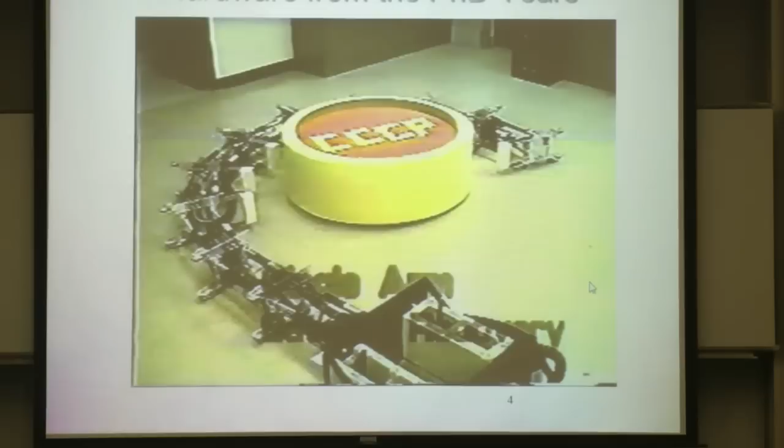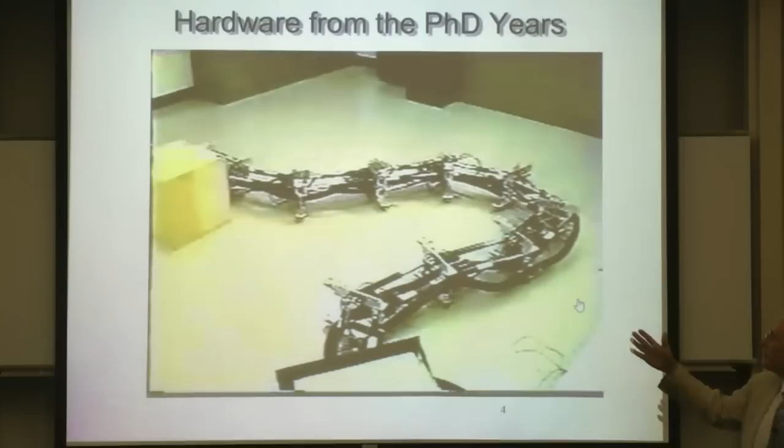So as Howie mentioned, I started my academic career building robots like this. And to show you how old I am, this was supposed to be a robot in outer space catching a Soviet satellite way back then. This was the land version of that. And the idea of this 30 degree of freedom robot was that it would have enough freedom that it could circumnavigate obstacles, do things like inspect power plants or do inspection tasks on assembly lines, things like that.

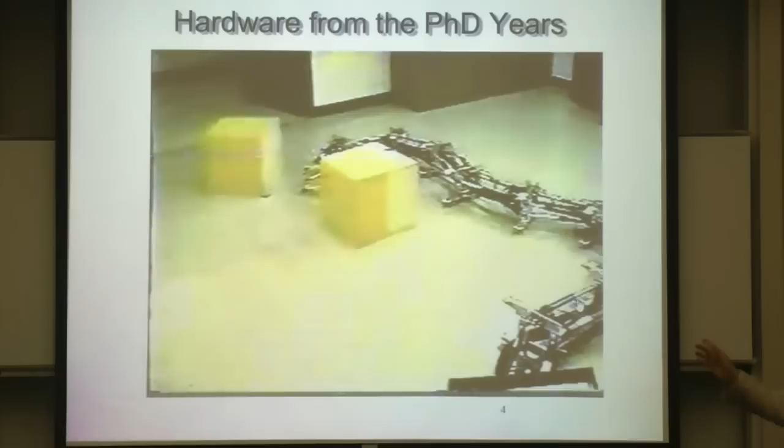And in fact, I showed these very same videos when I gave a lecture here, I think in 1991 was the first time. And so this is all older work. And these are simulations from those old days where we can use snake-like robots to perform caterpillar-like grasping and manipulation of objects, or to do inspection in moving obstacle environments like on an assembly line.

So this is what I did in snake robots way back when. And then shortly after starting at Johns Hopkins many years ago, decades ago actually, we came to this concept of what we called the binary manipulator. The idea being that to make very inexpensive, lightweight robots, instead of using heavy, high torque motors, we could use pneumatic cylinders, which are very lightweight and have a very high payload to weight ratio.

And the idea is with a pneumatic cylinder, instead of trying to control it in the middle of its stroke, drive it all the way to one end or all the way to the other end. So that's a binary actuator. And so if you make a platform manipulator out of these binary actuators, you get a 3-bit manipulator. One binary actuator per leg, so a total of 2 to the third or 8 states, because you have 3 bits here. And we can take these binary actuated platforms and stack them on top of each other, and then you get something that looks like this in the planar case.

And so the surgeons were viewing that as a nuisance, but Alison Okamura had the intuition to say, well, could we use that to our benefit? And she came to me, I don't know, 2002 and 2003, and asked, can we develop a model to describe the motion of this? And so I developed a kinematic model. It's a non-holonomic model that looks like this. So it's kind of like a kinematic cart or a steerable wheel, but moves in 3-dimensional space.

And so with this needle, if you push the needle in, you can make the needle curve on a circular arc. And if you twist at the base, you can reorient the tip. So by pushing and twisting, you can actually steer this system in 3D. But what we noticed when we performed experiments, and the experiments were not performed by sticking needles into people like a pincushion, but rather using a block of porcine gelatin. Because it's transparent, with the camera setup in the shared lab facility, it was possible to trace where the needle was going. And so the needle wouldn't go the same way every time.

There'd be slight deviations. And so we augmented the model with stochastic terms, and so we end up with a stochastic differential equation that describes random walks in pose as a function of time. And so these are Brownian white noises, so increments of Wiener processes, unit strength. This is a coupling matrix, and we were able to show with a very simple 2-parameter model on the noise that we could reproduce the range of different trajectories that this needle was taking.

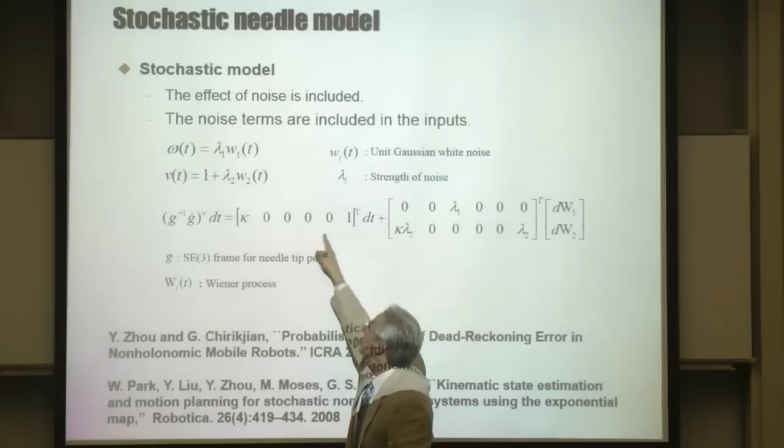If we didn't have any noise here, this just says that the needle wants to follow a circular path with curvature kappa. And the G inverse G dot is a body velocity, and the V is like in the Murray, Li and Sastry textbook, for those who've taken an intro to robotics course, that takes this velocity and writes it as a 6-dimensional vector.

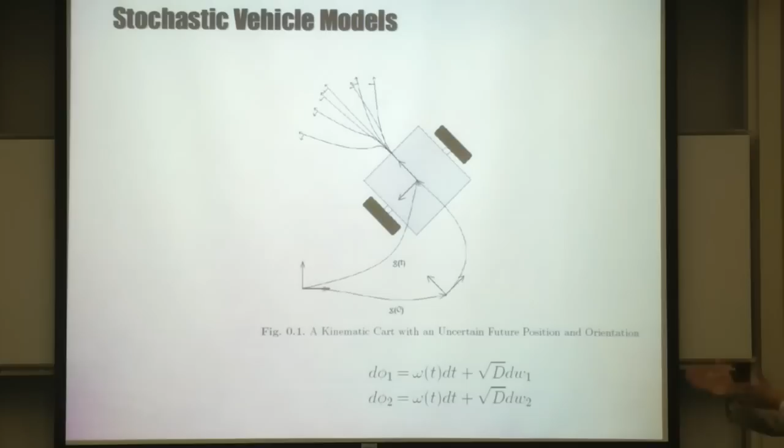So now that's the spatial version, the 3D version of a non-holonomic vehicle like a kinematic cart. So if you have a kinematic cart, just like a wheelchair where each of the 2 wheels can move independently, and if you tell those wheels go straight forward and do dead reckoning, you believe you're following a straight line forward. But actually, if the wheels slip or there's a little bit of jitter in the motors, then you'll veer a little bit to the left or a little bit to the right or zigzag back and forth.

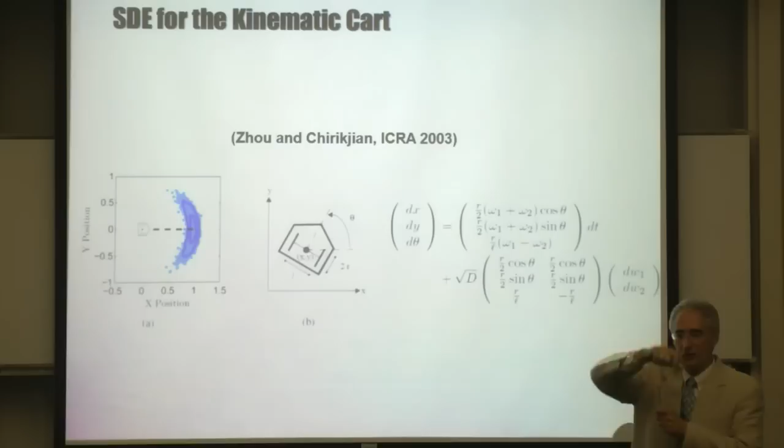And so that's adding noise to the wheel model, the non-holonomic equations of motion. Then you get a stochastic differential equation that looks like this. So this is sort of equivalent to a particle filter. And so if you could run this a gazillion times and get many stochastic trajectories and histogram up the end position and orientation, you'd get this banana distribution. And that's often what's done in simultaneous localization and mapping.

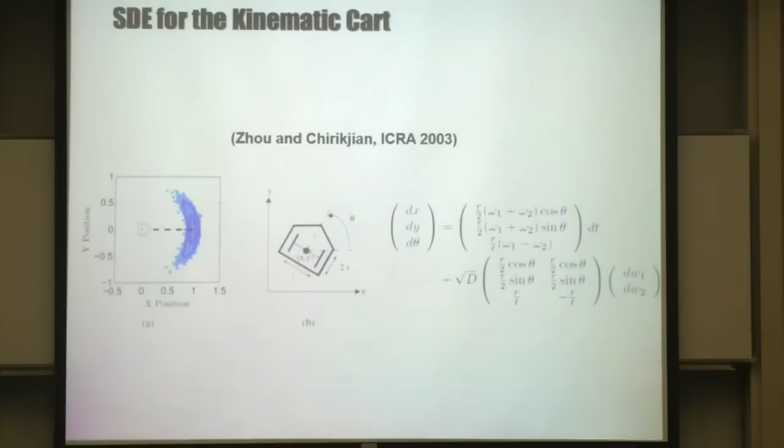But another approach is to say, instead of simulating many trajectories, we can propagate the whole probability density, starting at the beginning where it's like a Dirac delta function where we know exactly where we are. The probability is concentrated where we know we are. That's our initial condition. And then we have a diffusion equation here. So this is like a heat equation that takes that initial Dirac delta function, and as you go forward, it melts. It diffuses out. Okay?

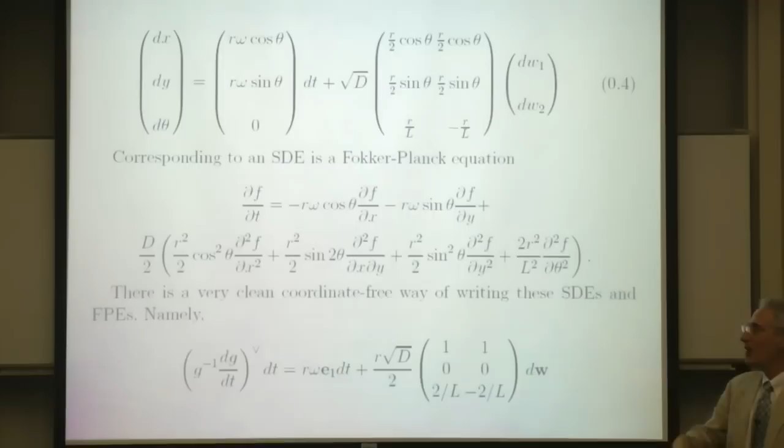Well, it turns out that this diffusion equation can be solved in closed form. And the reason why nobody observed that prior to us was that x, y, and theta are not the right coordinates to be using. Because when you use x, y, and theta, you get this banana distribution, which is not a very convenient thing to express in closed form. But if we use what's called the exponential coordinates, then we get that the banana distribution in x, y, theta coordinates is actually a Gaussian in exponential coordinates.

So we wrote this paper, the banana distribution is Gaussian, right? Now everybody says, wait a minute, it's not Gaussian. X and y, it's bent like this, it doesn't look like a Gaussian. But if you use a different coordinate system, then you get a Gaussian distribution in those coordinates. So I'm not going to go through all of the math, but that's what my new book is about. It's about how to do probability and statistics on Lie groups, such as the group of rigid body motions.

What does it mean to define the mean, and what does it mean to define covariance, and how can these quantities propagate under convolution as you go along a path? The covariance spreads out more, and so this is a diffusion process that can be handled using ideas from probability and statistics. And together with my colleague Marin Kobilarov, we're looking at filtering algorithms that use these ideas to fuse priors, such as this dead reckoning model, as well as measurement models that also can be described using these banana-like distributions.

So I'm going to move on. This is sort of a rapid-fire talk of many different topics, not in any great depth. But if anything interests you after the talk, you can send me an email and I can point you in the right direction to get more information.

Topic 2 is a project that we worked on a few years ago, actually a decade ago, on spherical motors, and its relationship to medical imaging. So actually these two problems are the same mathematical problem. So we have some suite of mathematical tools that we use, and then we just try to tackle a number of different problems. So the first subtopic here is spherical motor and encoder design.

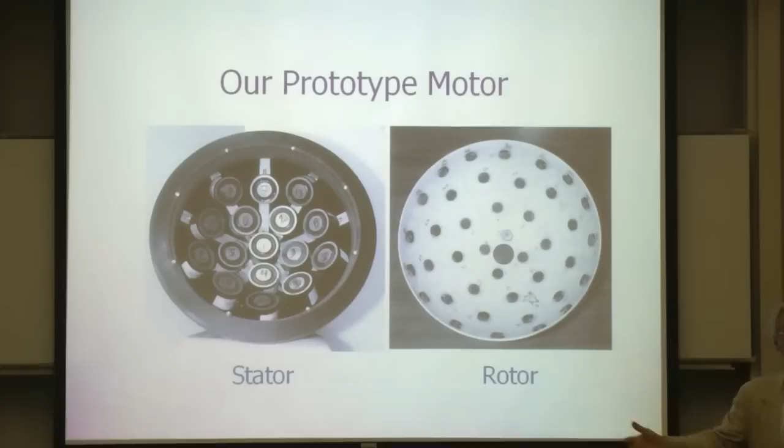And so we came up with an icosahedral and a modified octahedral packing. So we ended up writing papers on how you pack circles on the surface of the sphere so that you could get different arrangements that were compatible between stator and rotor. But what's maybe more interesting is actually the encoder that we came up with.

Of course, if you have rotation around a fixed axis, you can put your shaft encoder perpendicular to it. But if you have a ball motor that's rotating in all 3 degrees of freedom, where do you put your encoder? Well, we decided to paint the ball in black and white strips and put light sensors inside of the stator. And so the light sensors would see black and white, so you get a bit stream from those sensors.

And we have a model, because we know how we've painted the ball, and in our computer model we could rotate and see when does that bit pattern click into place and match what's being observed. Well, it turns out that from an initial guess of the orientation, we could do gradient descent over the group of rotations. But this is a non-smooth function because a sensor goes from seeing black to white. That's a discrete change. And so we came up with a non-smooth gradient descent procedure for optimizing functions over orientation.

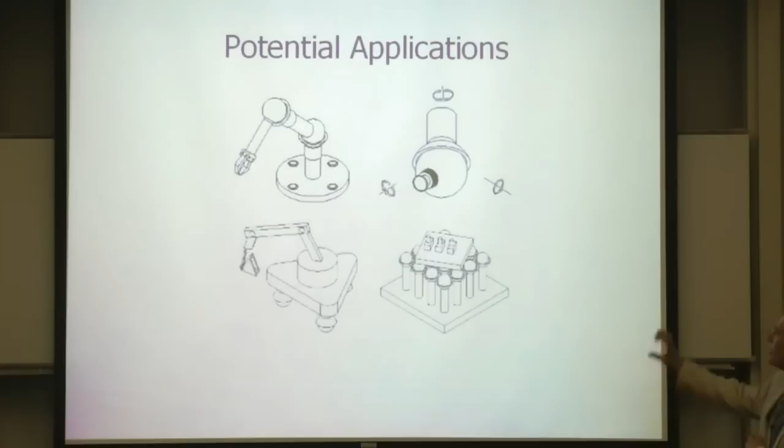By the way, there's many potential applications of spherical motors, including multi-degree of freedom ball and socket joints, or cameras, or you could have an array of them for moving parcels at UPS or in the post office, or you could use them as spherical motors for vehicles, spherical wheels for vehicles. By the way, we published this paper before the movie I, Robot, where they had the spherical wheel cars. So that just tells you how old this is.

But the other application where we used exactly the same mathematics was in a medical imaging problem where you have a patient. Typically, they use this for children to keep their heads steady in a CT or MRI scan. And so the idea is you have something called a head cage that basically they screw down onto the person's head, and then the person goes into the imager, and then the imager takes image slices.

Now, if the person didn't move at all, they could just stack the slices up and get an image block. But typically what will happen if you put a child in an MRI machine, they're going to be squirming around, and then they take the head slices through, and because there was movement, you can't just stack those slices up. But then how do you merge those slices together?

Well, it turns out that when you take the image slice through, you're also getting a pattern of dots where the image plane intersects this head frame. Okay? And from that pattern of dots, you can figure out what plane that image plane actually was. And figuring out what plane that was is actually a gradient descent procedure over the group of rotations and translations, SE3. And so we used essentially the same gradient descent procedure as in the spherical encoder for this medical imaging problem.

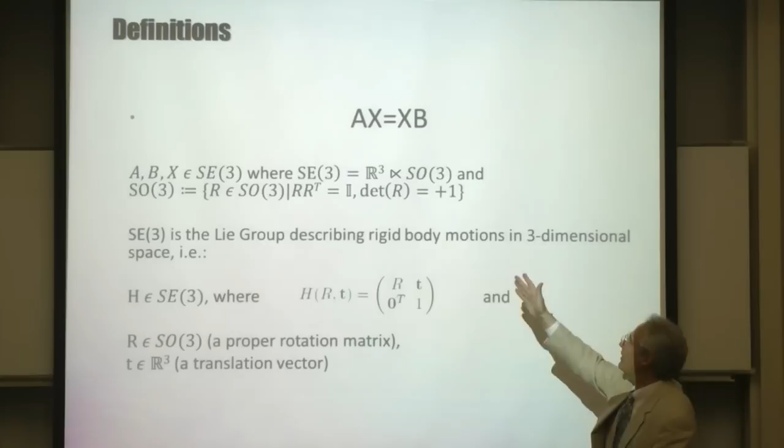So A, X and B are elements of SE(3), the group of rigid body motions in three-dimensional space. We're describing them as homogeneous transformation matrices. This is very old, like 200-year-old work. Chasles' theorem says that basically every rigid body motion in space can be described as a translation along some line in space and a rotation around it. So that's called the screw axis.

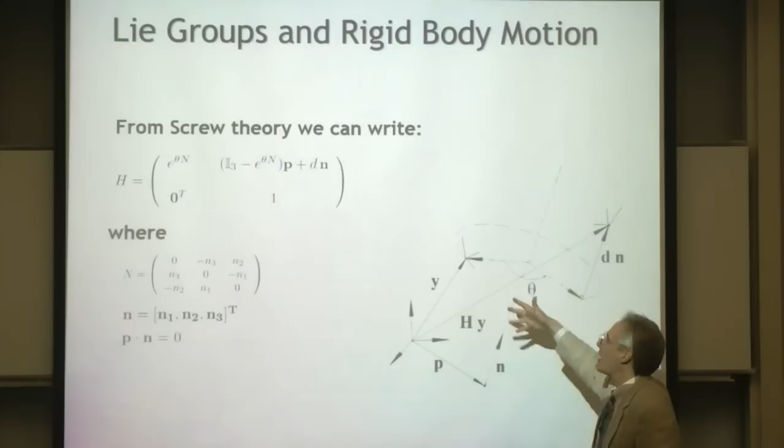And so the distance d along the screw axis is the translational part, and the rotation is theta around that axis. And any homogeneous transformation can be broken up into these screw coordinates. So little n is the unit vector describing the axis of rotation, and capital N is the 3×3 skew-symmetric matrix that encodes the same information as this unit vector.

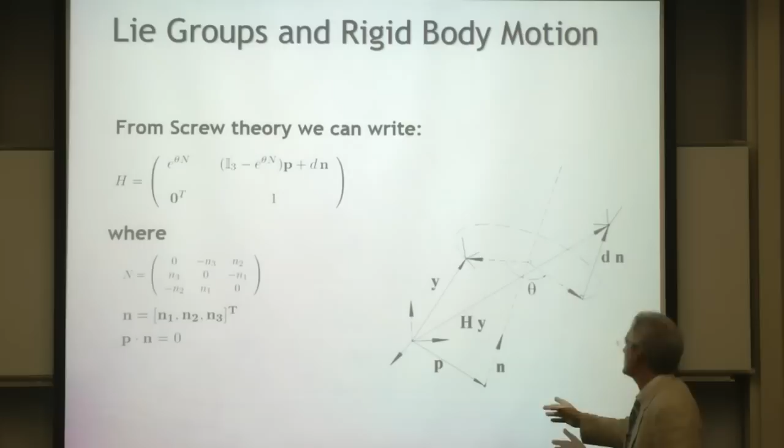And so if we go back to the AX equals XB problem, there's a bit of a busy diagram here. So you have two rigid body motions, one with a screw over here and one with a screw over here. And to make a long story short, the only way that AX equals XB can have a solution is if the A and the B both have the same angle of rotation, the same theta, and the same d. Okay, so that's a necessary condition.

And that has to be true if you have two pairs, A1, B1 and A2, B2. A1, B1 have the same theta and d, and A2, B2 have the same theta and d as each other. But also, you have these two screw axes, and there are conditions on them. If you have two pairs, they can't intersect, and they can't be parallel. Okay? And so there are these other conditions that need to be satisfied in order for AX equals XB to have a solution.

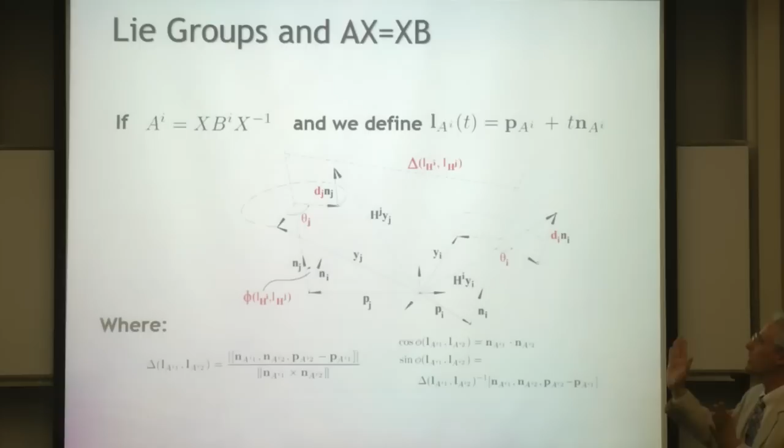And we use these conditions, these invariants of the group of rigid body motions, and actually pairs, so the direct product of this group, to filter, because the traditional algorithms for AX equals XB assume that you have correspondence between the A's and the B's. But sensors can provide data at different rates, and you get a bunch of data for A's and a bunch of data for B's, and they might not be synced.

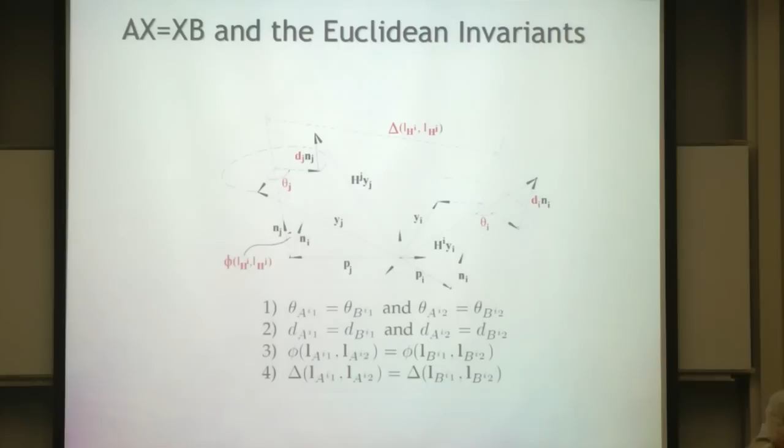And so we have ways to sync that data when it's not synced in advance, using these invariants, because we know that the data can't match unless the invariants are the same. So we use the invariants of a Lie group as a filter to figure out how these data streams should match. And this is relatively recent work. This is just saying what I said before, that the thetas and the d's have to match, and also the angle and the distance between the screw axes have to match.

Okay, so I'm going to move to the next topic, which is very different in many ways, and in some ways the same. It uses some of the same mathematics, which is modularity in manufacturing and autonomous field robots. So that seems like a pretty broad topic.

So there's work that my former student Matt Moses did for his PhD on a modular manufacturing system. This is much more recent work than some of the others. It's an XYZ platform. It's made out of bricks that we actually cast ourselves in molds out of plastic. And so this whole robot is screwed together, like Lego blocks.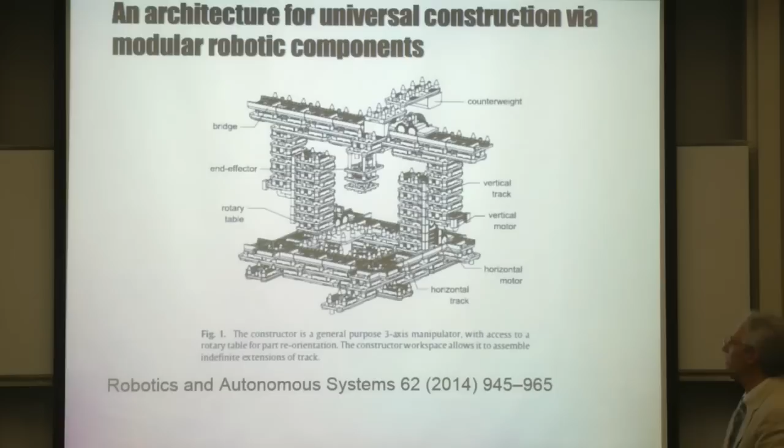And it can do XYZ maneuvers. I'll show some videos later. And the point is that given a stack of parts, like the parts that the robot is made out of, this robot can go and do pick and place and screwing operations and actually assemble a copy of itself. Okay, so we call it a self-replicating robot.

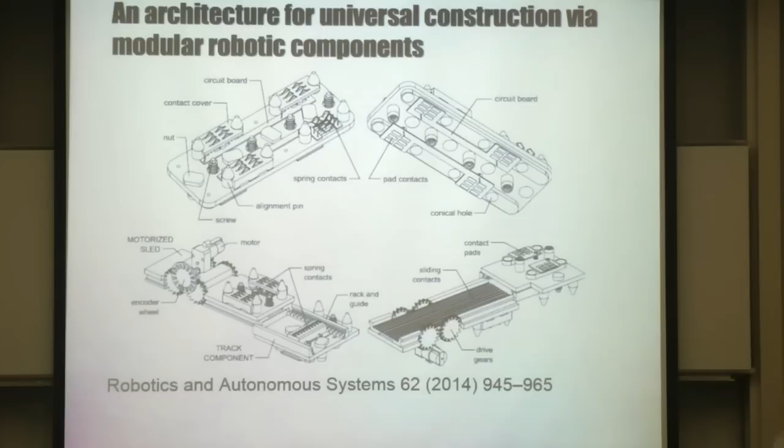So here are what some of the different parts look like. There are motor modules, and there are structural modules. There are guides and gears and various things. I'll show you in the video. It'll become much more clear what the ideas are.

So where's the science in all of this? Well, if you go back to 1984, which was, I think, the first ICRA, Art Sanderson from RPI published a paper on what he called parts entropy. Okay, and Matt knows about, you have a question about parts entropy? He was at Carnegie Mellon. He was at Carnegie Mellon. Yes, he was at that time.

So the idea of parts entropy is that if you have an assembly line, let's say you throw parts down at random, then those parts are going to have a certain joint distribution of positions and orientations. And a measurement device like a camera will reduce that entropy because it will give you knowledge about the positions and orientations of those parts. Well, we're taking a different tack, which is to say if you want to mate two parts, then designing those parts so as to reduce the parts entropy can assist.

So for example, if you want to insert a peg in a hole, actually that's Matt also, right? The Lozano-Perez, Taylor, Mason paper, in a different order of authorship, going way back. So if you want to insert a peg in a hole, you have to be straight on. But if your hole is conical and your peg is a cone, then you have a lot more freedom to be wrong, and as you insert, it will self-align. And so we design our parts so as to overcome this sort of parts entropy.

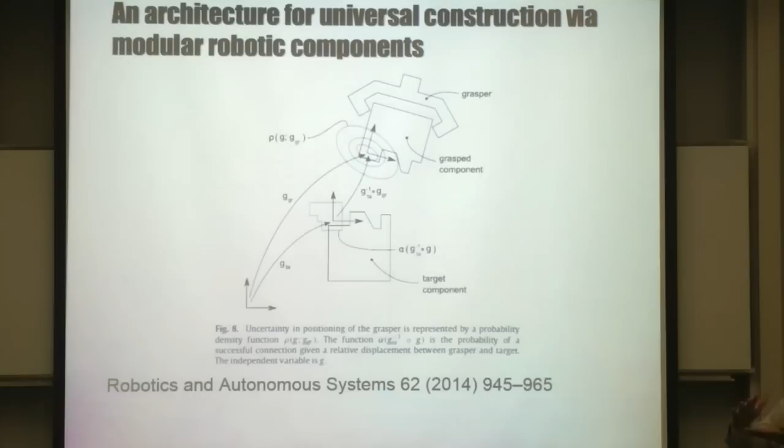So in each part that we have in our robot, the bottom has a conical hole and the top has a conical peg, so that the robot doesn't have to be very sophisticated and it can still mate the parts. And so we did an analysis of the probability distribution of how off your poses can be, and you can still mate the parts reliably. So this is related back to the parts entropy idea. So I'll show videos at the end.

The next topic that uses the same idea of probabilities in pose is teams of mobile robots that diagnose and repair each other. So the idea is this. I like modular robots. So we have a team of modular mobile robots. There are 4 parts in each of these robots. And so if this part breaks down, it's easy in principle for another robot to come in and take that out and put a replacement part in.

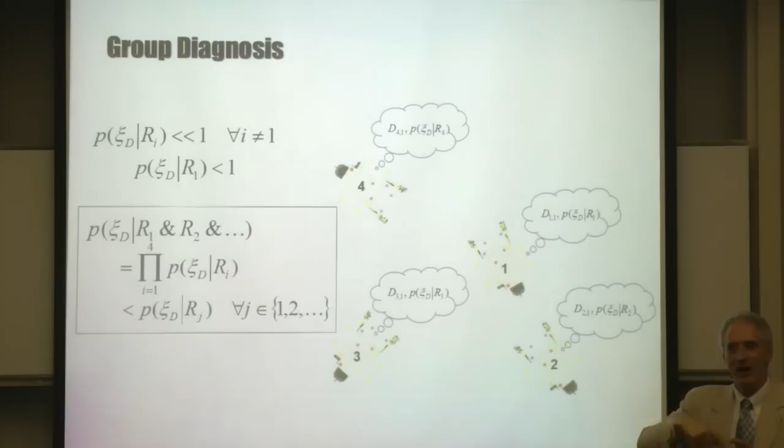But first, if the team is autonomous, they have to decide amongst themselves which robot is not functioning correctly. And then how do they make that decision? Well, the idea is if you have, say, n robots, then n minus 1 of them can be watching one robot. That robot can go through a little diagnostic dance, like move your gripper up and down, do a figure 8 pattern. We're going to watch you, and we're going to see how well your performance is relative to the nominal performance that we expect.

Now, of course, there's going to be some noise to be expected, so this is a probabilistic assessment. The actual path that's observed is the path, but the normal behavior is described by a time-evolving probability that's nominally along that path.

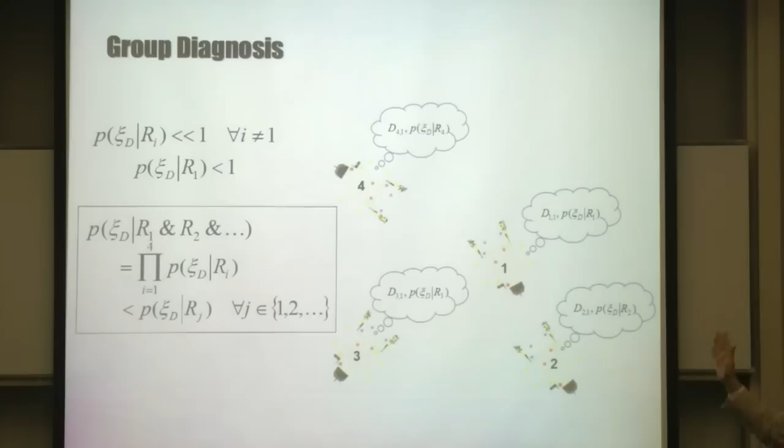And so what we can do is a maximum likelihood calculation of assessing the configurational or conformational path that the robot executed relative to the probability of trial runs of what normal behavior looks like. And we can do that not only for normal behavior, but we can a priori simulate all kinds of different fault modes. So then the robots can collect information, pool their information in a Bayesian setup, and ask the question, what is the most likely state of this robot?

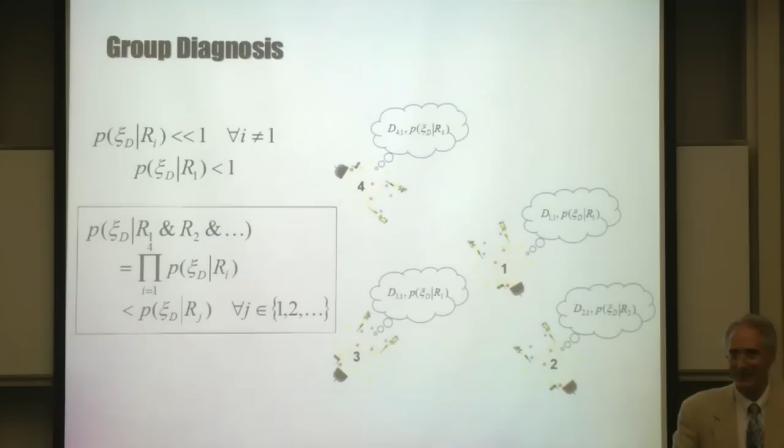Is it healthy? Is the left wheel burnt out? Is the gripper not working? And then, after they've made this diagnosis, if the robots are mechanically designed to be modular, then the team can go in, swap out a module, and swap in a new one. Or if they assess that this robot is too far gone, this is broken, this is broken, this is broken, then they can cannibalize it just for the parts that they know are working right. Okay? So that's the idea here.

I have some videos I can show of this, and we presented some of this at an ASME conference earlier. And we have a number of papers published in this area, both on the theory and in the implementation. Let's see how I'm doing. Okay, so I'll speed things up a little bit so there's time for some videos.

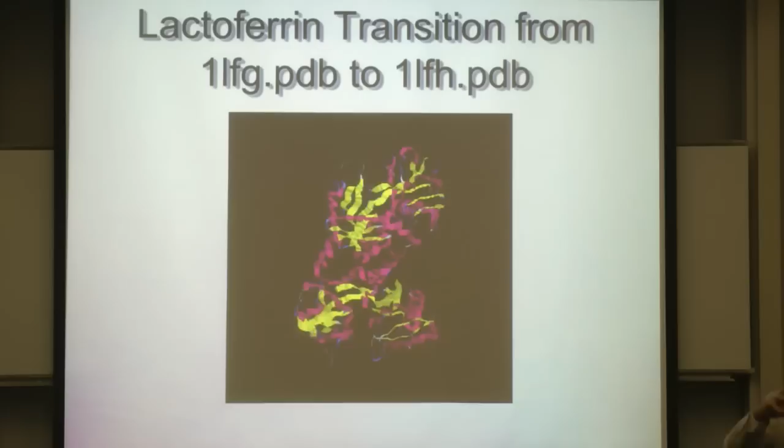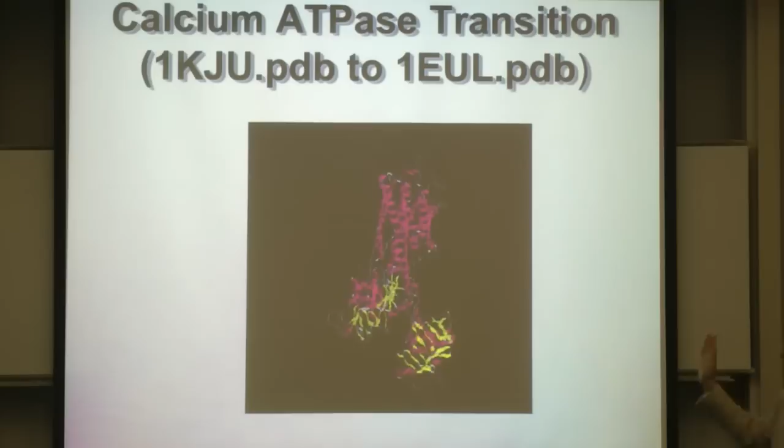And so the idea of proteins as large, complicated, high degree of freedom systems that react to the environment, change their shape, dock with each other. It's kind of like grasping or motion planning. It's all related. And so we do modeling of these motions. These videos were made by my former student Moon-Ki Kim, who went back to Korea as a faculty member and has been very successful there.

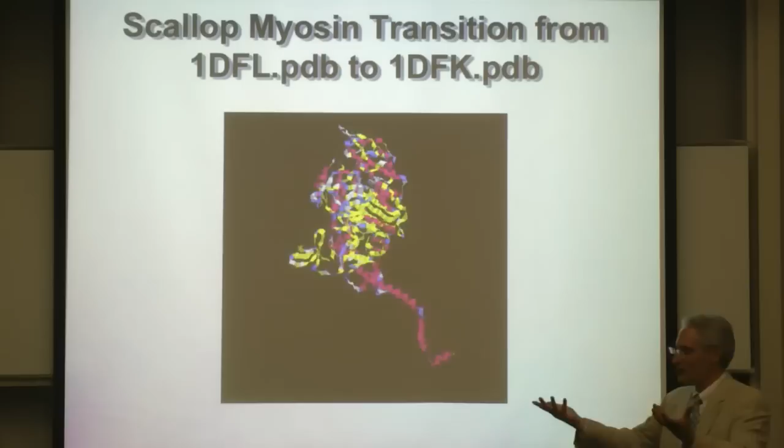In fact, he has a server set up where biophysicists can enter any two shapes of a given protein and he'll make a movie for them. So he gets lots of hits on that, and has become very popular that way. So I'll say the conclusions now, and then I'll show a bunch of videos.

So our lab does a lot of different things, including mechanical design. I'm in a mechanical engineering department: snake robots, spherical motors, modular reconfigurable robots, etc. We do a lot of applied mathematics, like in those books, image processing, medical imaging, what I call information-driven motion in robotics, including these sort of self-diagnosis schemes. But also you could imagine other schemes like trying to infer the intent of an actor, whether it's a robot or a human, from the trajectory that they're executing.

And many of these topics involve very similar mathematical tools. Whether it's probability densities on Lie groups or the invariance, it all comes back to this sort of group theoretic and differential geometric view of the world. And now I will show some videos, if I can get to the right place. Okay.

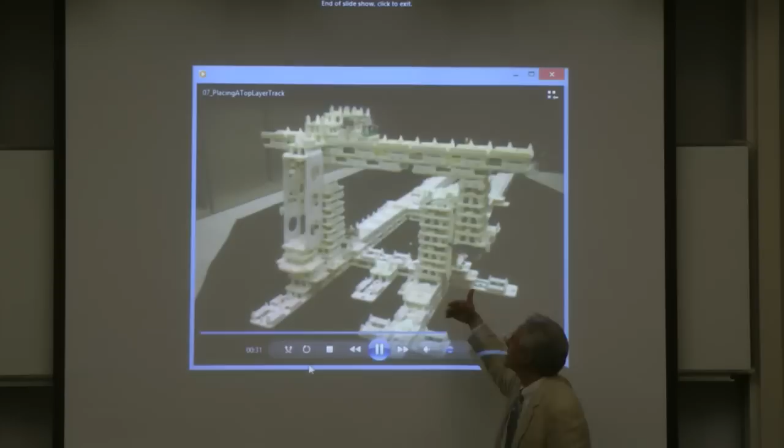So this is showing what you could call a modular manufacturing system, or if it's building itself, it's a self-replicating robot. If it's building something else, it's a modular manufacturing system. So we certainly don't have Ralph Hollis's level of precision in these, but our goal is to make relatively simple robots that can do complicated things. So these are parts cast out of plastic. They do have these conical pegs and holes, and so it's very easy to pick and place parts.

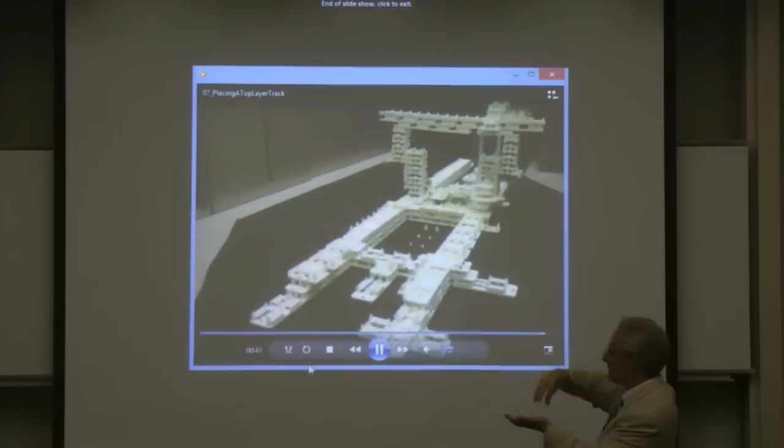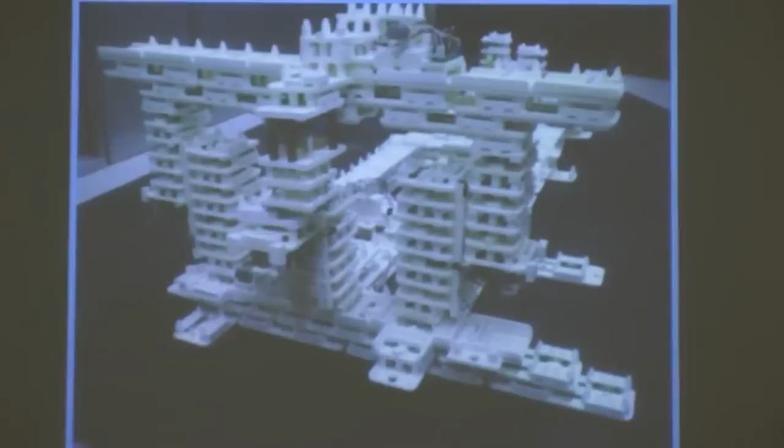And the end effector, so I'll show some other versions of this. The end effector is a combined wrench and screwdriver at the end of it. The screwdriver is a female part of a screwdriver, and each part actually has a threaded screw sticking up. So we pick up parts by having this screwdriver latch down onto the screw fixture of the part, pick it up, bring it over, drop it down, and use the conical setup so that the parts can be reliably put in place.

Then it unscrews. Then the wrench part of the same end effector comes down and tightens a bolt down. So from a set of stacked parts, those stacked parts could be all screwed down into a block of parts. This robot can pick up parts from the stack, place them down, and create a copy of the original, or create any combination of parts from that initial set. It doesn't have to be a copy of the original robot. It could be something else. So we've constructed little cars and things made out of the same parts.

So, another part of this problem is to ask the question, how complicated does a robot have to be in order to be able to reproduce itself? If you think of a very simple robot, then there's far less to do to make a copy of it, but then is the simple robot able enough to make a copy? And other questions like, what does it mean to self-replicate? Well, if you have a bacterium sitting in a soup of nutrients, yes, it can self-replicate. If you have a person on an island and they only have sand to eat, no, they can't self-replicate.

And of course there's Hod Lipson's cubes, and so the question is, how do you define whether something is self-replicating or not? And the answer that we came up with is that that's the wrong question. The question is, what is the degree to which something is self-replicating? It's not a yes or no question. If you have something that's made out of 1 billion parts, and that thing assembles each of those 1 billion parts into a copy of itself, you might say, well, yeah, that's convincingly self-replicating.

Gerard K. O'Neill talked about these kinds of things way back. And also Robert Freitas, there was a NASA report from the late 1970s that sort of said the same thing, but they didn't actually have a physical instantiation of the concept. Okay, so this is an actual physical demonstration that it is possible for robots to assemble parts to make a copy of itself. And combined with things like 3D printing and other technologies, the sky's the limit.

Okay, so I'll show, let's see, I don't seem to have the other videos. Let me see. Oh no, okay, that's the wrong thing. We're doing things with 3D printing in irregular domains.